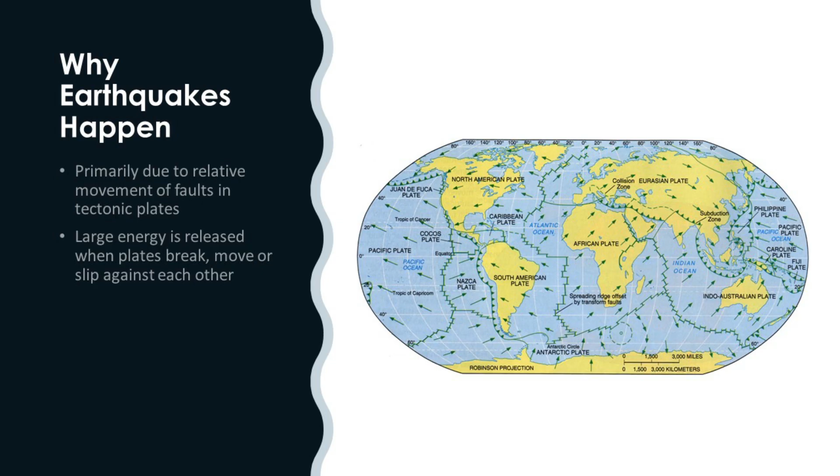First, let's go back to the basics. Why do earthquakes happen? What causes an earthquake? I'm sure all of you listening are already aware that earthquakes happen because of the movement of tectonic plates, because of the faults that are generated—they move and accumulate energy when they cannot move, and then suddenly move, and you get earthquakes. So that we know, and there are so many plates with movements around the world.

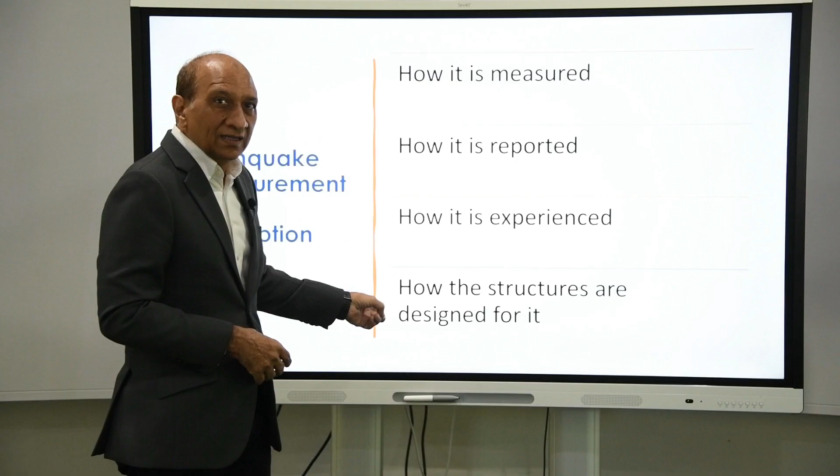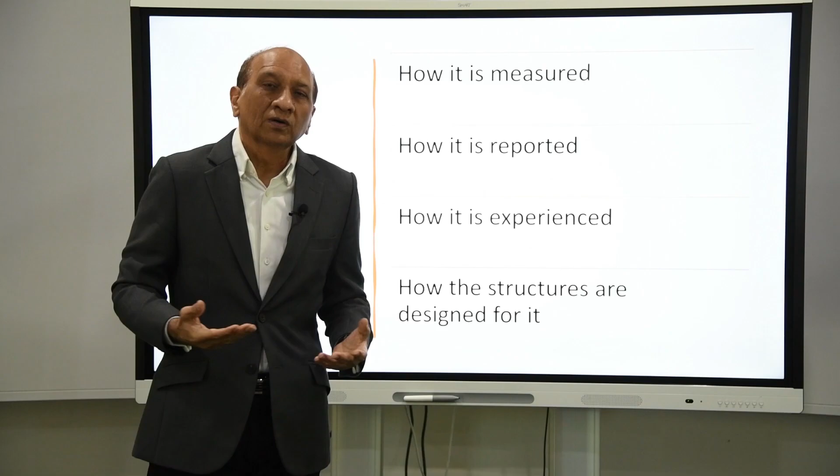Once an earthquake happens, there are four things related to that earthquake event. Number one, how is it measured—what is the measure of the earthquake? Second, how is it reported in the news? Two different things. And then, how is it experienced by people near where the earthquake happened, far away, and in other places—in a tall building, at the ground floor, or in a car? Everybody experiences the earthquake differently. So the experience of the earthquake, how it is reported, and how it is actually measured are all very different. And how it is designed for is much different from all three—how a structural engineer designs for earthquakes is a very different story compared to all of them, and they are not directly interrelated. But somehow they are related, and that relationship is what we are looking at today.

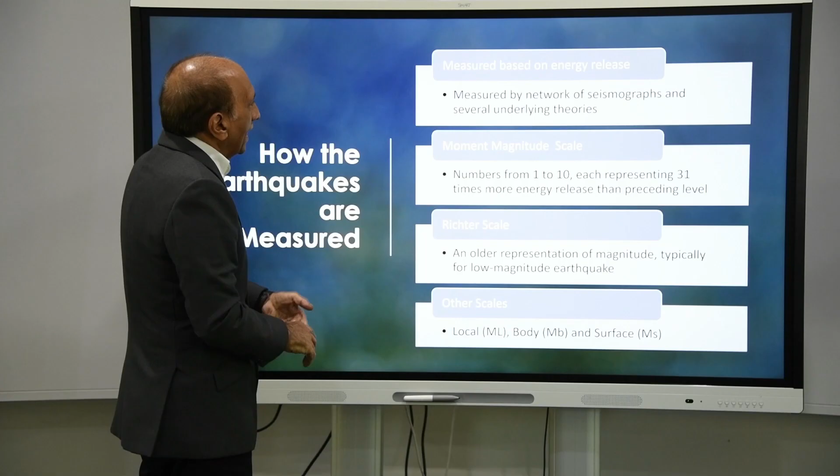So what is the measure of the earthquake? How is it measured? An earthquake is basically a release of energy that has been accumulated because of strain. It is measured as the energy released at the source where the earthquake happened, along the fault, depending on the length of the fault, the movement, the type, and other things many of you already know. So the measure is energy, and we put it on a scale—those scales tell us from the minimum zero energy to the maximum possible energy that can be generated. That's why we have the most common scale, called the moment magnitude scale, which is the one we normally report.

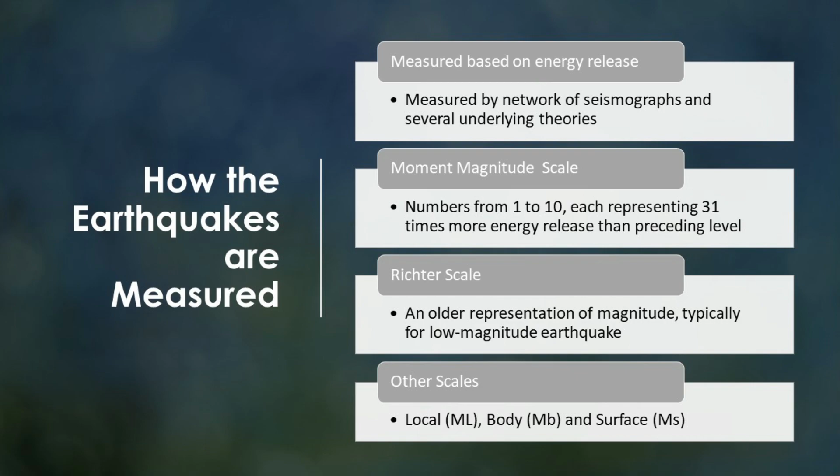We see the report in the news where they report this magnitude, say 6.87, on a scale from 1 to 10. The Richter scale, which some people are familiar with, was an earlier version of the same scale, but it wasn't as good at measuring large earthquakes, and it was more of a local effect. It didn't have many of the good things that the moment magnitude scale has, which covers the local body and surface waves together. So this moment magnitude scale is a more comprehensive measure of the earthquake, and that's the one you normally see reported in the news. That's the common measure now.

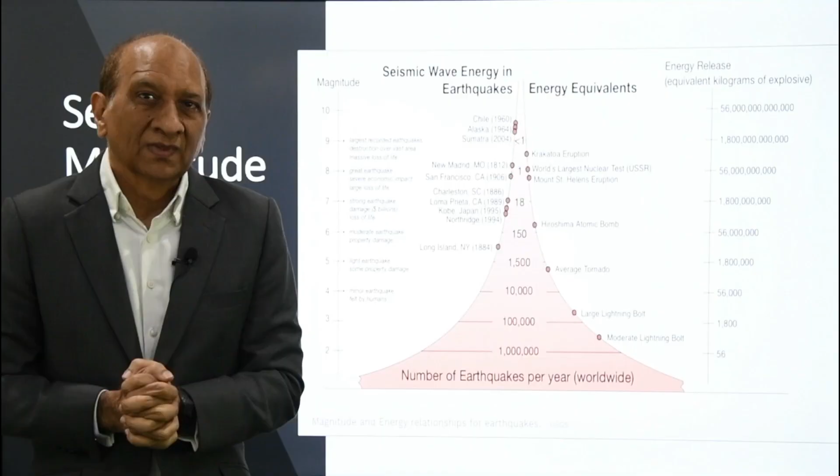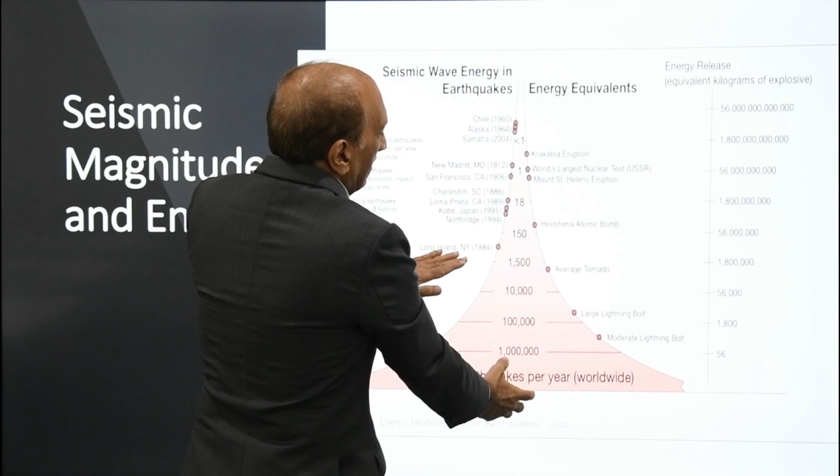Now, one important thing about this scale is that it's even beyond log. Every step in the scale is about 31 times stronger than the previous number. So the energy released goes up by billions of times as we go up the scale. And the number of earthquakes that happen is the reverse: a lot of earthquakes happen with lower magnitude, and very few happen at higher magnitude. We assume that beyond 10 there is no earthquake computationally possible.

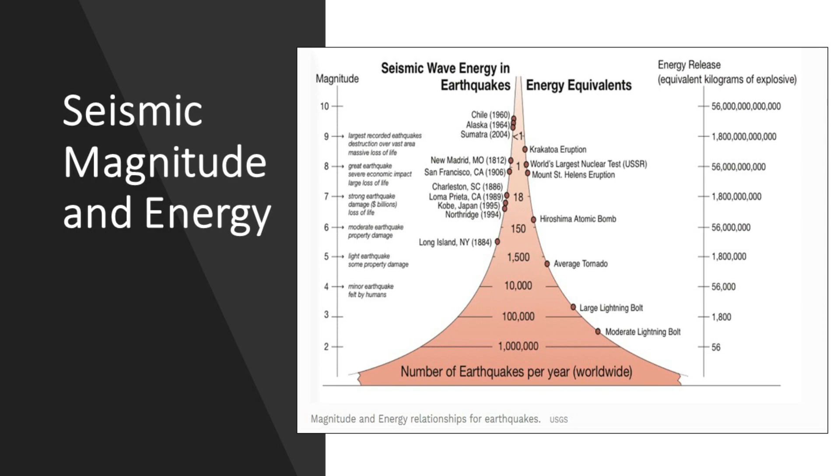So that's the scale, and you can see a lot of earthquakes listed on it. This is the scale that people are normally familiar with, not the one we're concerned with. Now, where is our structure on this? Where is the earthquake and where is the structure that we want to design on this scale?

Let's come to the next one: how it is reported. This is how it is reported, as I showed you. They say a 6.2 earthquake happened and many people died, bodies are being discovered, and they show pictures of buildings fallen down, completely collapsed, cars crushed, and so on. That's the image people get of a strong earthquake, even at 6.2 magnitude. And then people get worried about what their house is going to do if an earthquake like that happens.

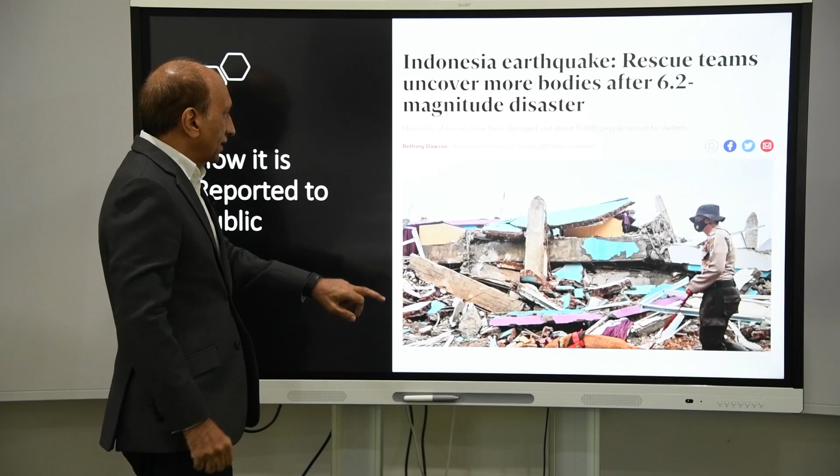This is videos, this is news, and it flashes everywhere, making everybody concerned about their community and their house. Now, how they feel the earthquake is another issue. When an earthquake happens, depending on where they are, whether they're awake or asleep, moving or standing still, on a tall building or on the ground floor, they experience it differently and feel things moving. Depending on that feeling, another scale, the Modified Mercalli scale, is used, ranging from 'not felt' to 'extreme.' It's all related to how you feel.

Now, this is actually not related to the earthquake magnitude, because the earthquake may be happening very far away, your building may be very distant, so you may not feel it much, while people nearby may feel it differently. I've personally experienced several earthquakes of different kinds, in a tall building and on the ground. Last time there was an earthquake in Nepal in 2015, I was there, and there were many aftershocks which I could feel. We ran out of the school we were inspecting at one point because it was so strongly felt, since we were very close to the epicenter. But the same earthquake was not felt far away.

In Bangkok, I remember the tsunami - the earthquake happened very far away in Indonesia, but our building in Bangkok actually swayed so much that we had to go down the building. The water pipes broke in the elevator shaft because the building was susceptible to that kind of earthquake, with long period and so on. That's another story altogether. My point is that we all experience earthquakes differently, and how we experience it is based on this Mercalli scale - we can say an earthquake was mild or strong, not related to the magnitude, but to how we experienced it. That's another scale.

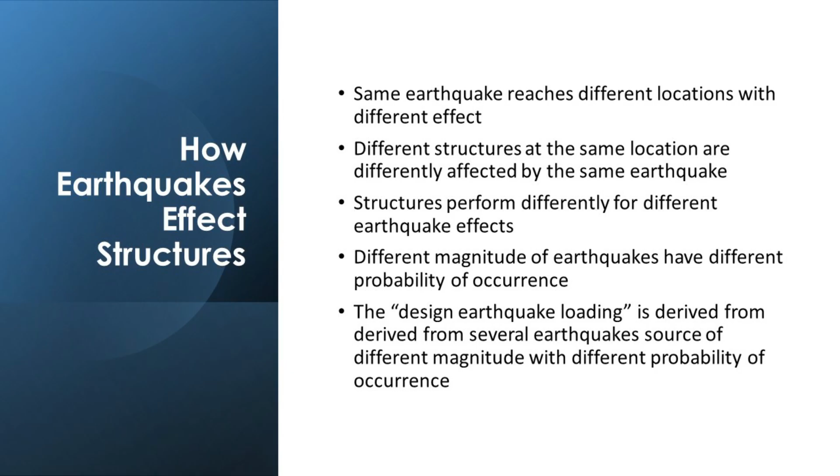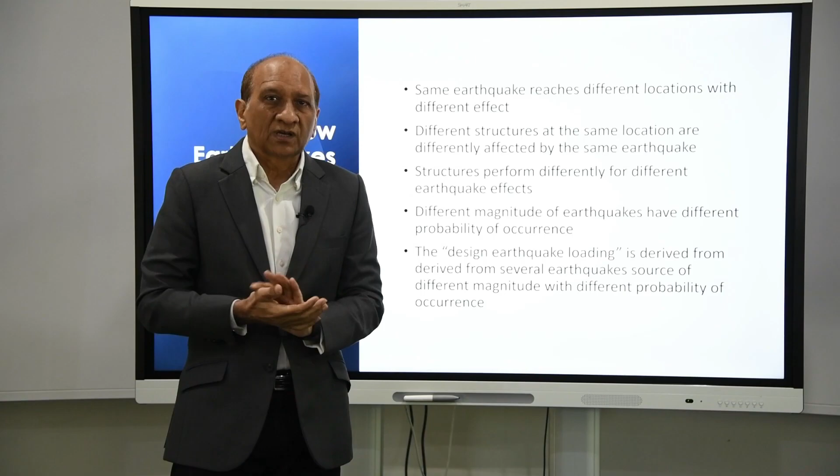Different magnitudes of earthquakes have different probabilities of occurrence. That's another issue—different earthquakes happen at different frequencies, and we need to consider that too. The design earthquake loading is derived from several earthquakes from different sources, different magnitudes, with different probabilities of occurrence. All this information is collected and analyzed, and the seismic hazard is developed by codes, building officials, or countries after accumulating this data and the risk profile of the particular location.

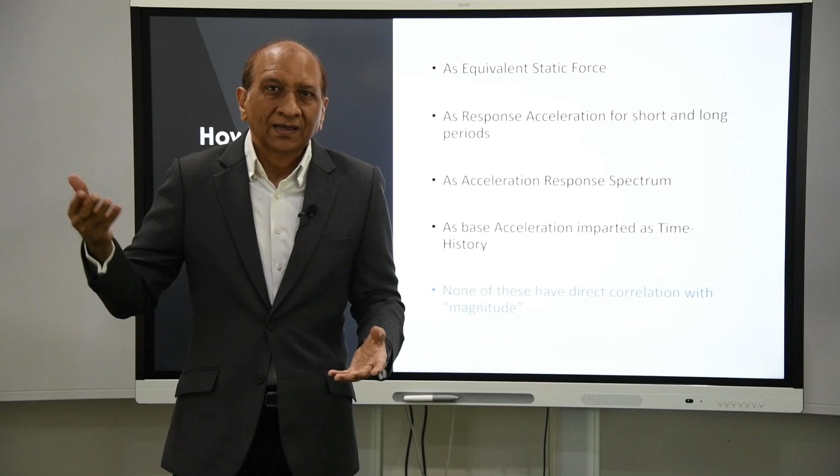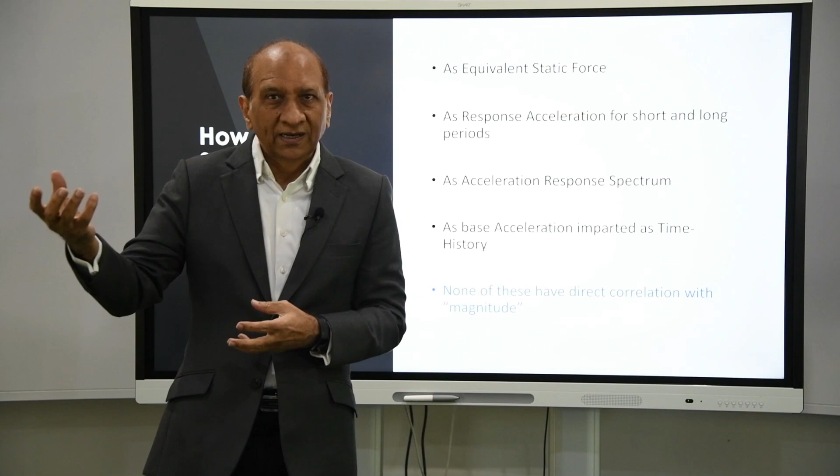Then maps are made, and that's what leads to the design—that's where the design earthquake comes from. We take that design earthquake and convert it into some kind of input to our structure. That input could be as simple as an equivalent static force—we convert the earthquake, a complex phenomenon, into just an equivalent force applied at each floor level. That's the simplest one. The second is converting it into response accelerations for short period and long period effects, covering buildings of different height, stiffness, mass, and natural frequencies.

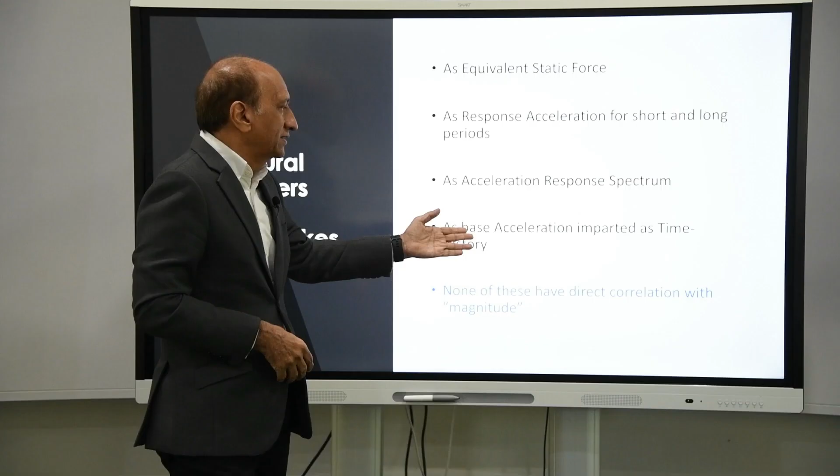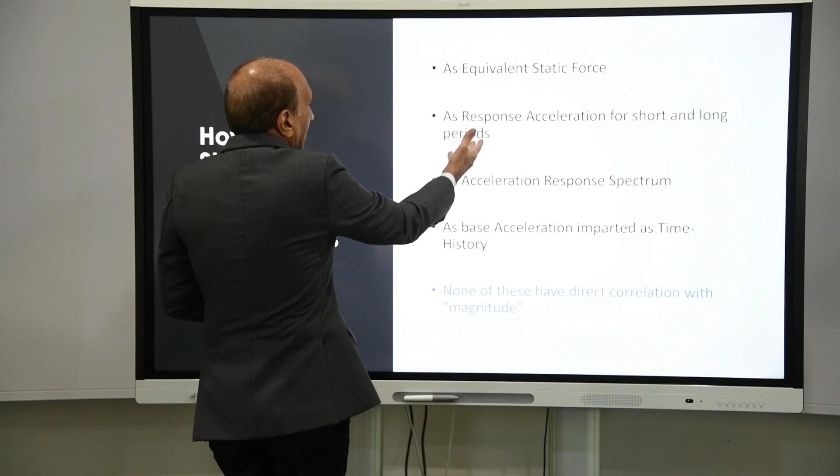Or it can be an acceleration response spectrum covering a broader range of response, or a base acceleration imparted as a time history, or we could actually shake the building with simulated ground motion to see dynamic and even nonlinear effects. We can do any of these depending on the type of structure, tools, and experience we have. Most codes let you do the first two or three, while the last one isn't done as often.

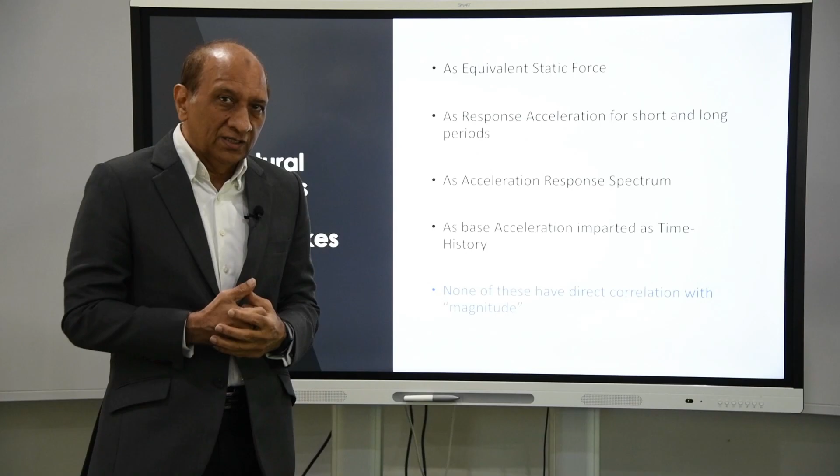But none of these have a direct correlation with the magnitude, as you can see. We're talking about things that are far from the magnitude of the earthquake actually happening at the location of the epicenter. So then, how are we going to connect it?

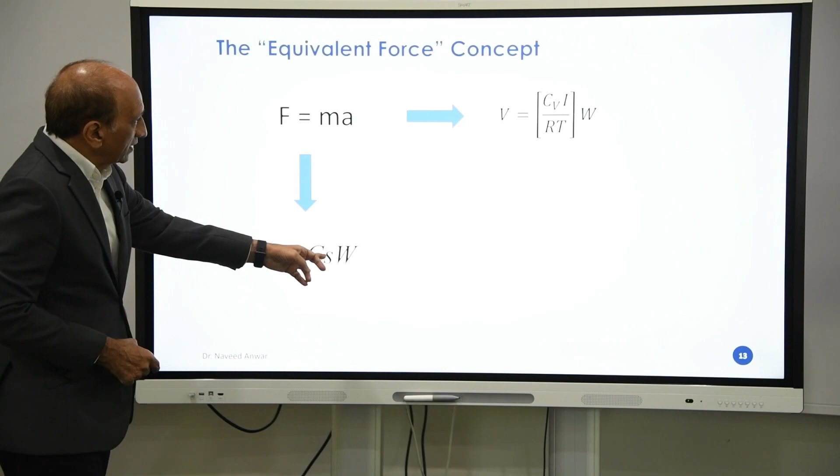Basically, we start with Newton's law of motion: force equals mass times acceleration, because earthquake is an acceleration. So we relate the mass of the building with the ground acceleration—but not the ground acceleration itself, rather the acceleration of the mass that's actually moving because of it. This leads to several equations—the old style has a factor that adjusts the acceleration and multiplies it with the weight, with corrections including the structure's type, R factor, and other things. Similarly, the newer version combines all of that into a single factor, which becomes more complex to determine and considers more variables. But basically, we're simply following F equals ma, modified for different things.

So this is an attempt to convert the acceleration response into an equivalent force using this concept, and corresponding maps have been developed.

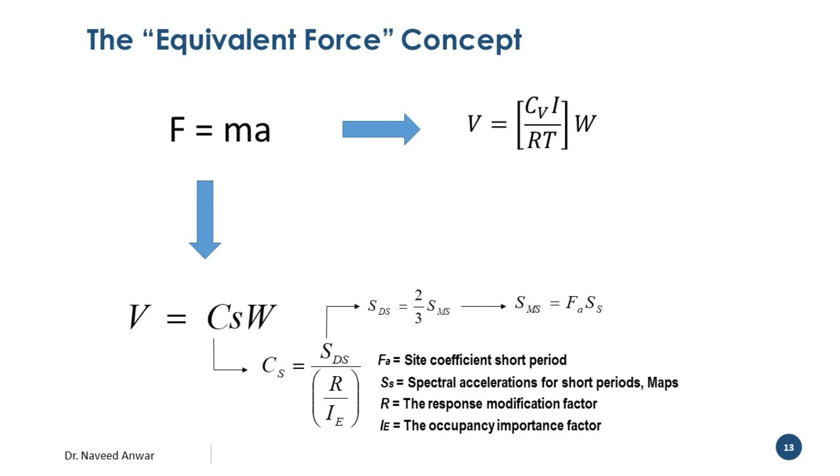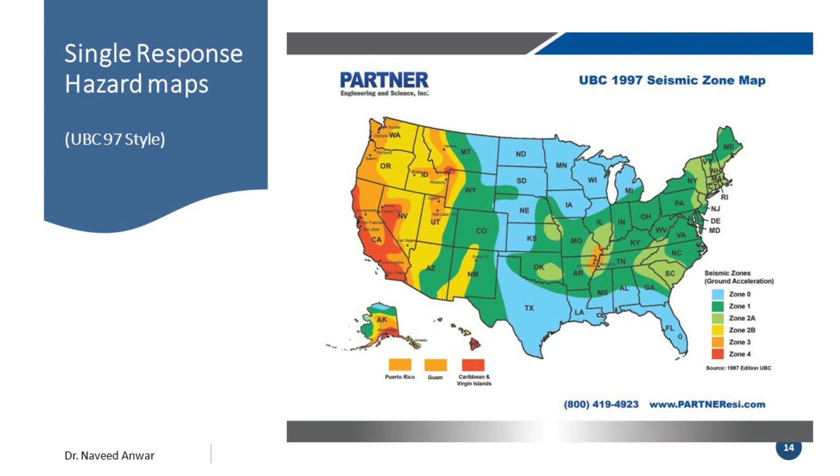This is a map developed with the older version of the equations, where the countries or regions are divided into zones from 0 to 4 or 5, indicating the severity of the hazard. People take that zone, take the acceleration associated with that zone, multiply it with the equation, and get the force.

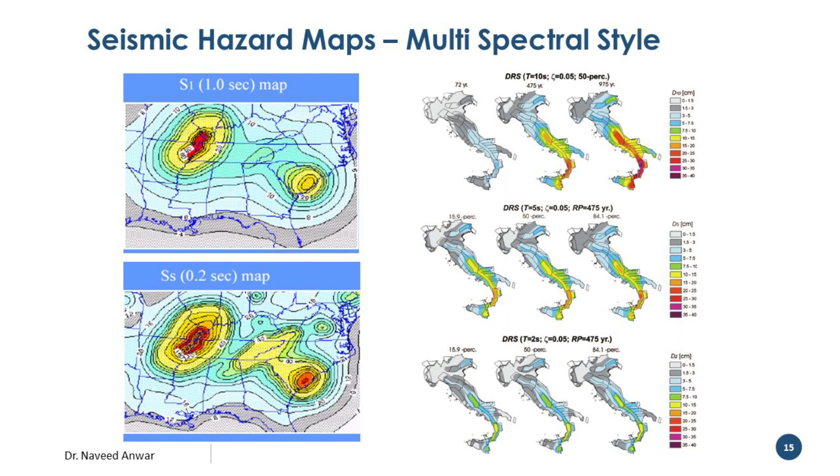The newer version or newer maps incorporate more details. They talk about the return period, the various parameters coming from the response, and they also have a short period response and long period response. These maps are more comprehensive and incorporate more information, and the newer versions of the equations can use this information. Or you can use the response spectrum developed for a particular country or region, modified by some factors for local conditions. The response spectrum covers a longer range of natural periods and can be applied to tall and short buildings as well.

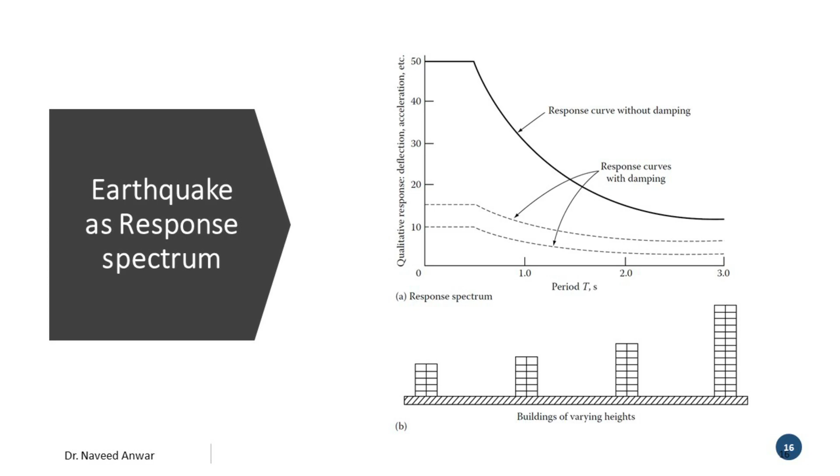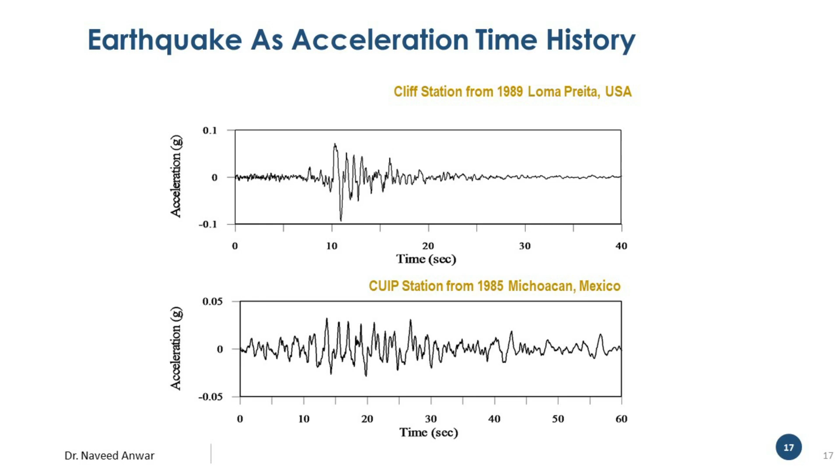So that's how we convert the earthquake into a way to apply that as a factor or as an acceleration that will be used to calculate force. Or we can shake the building by a simulated time history or series of time histories, then let the structure determine the forces based on that with the damping and all of those stuff. This is obviously more accurate as long as we have a good ground motion input that we can apply.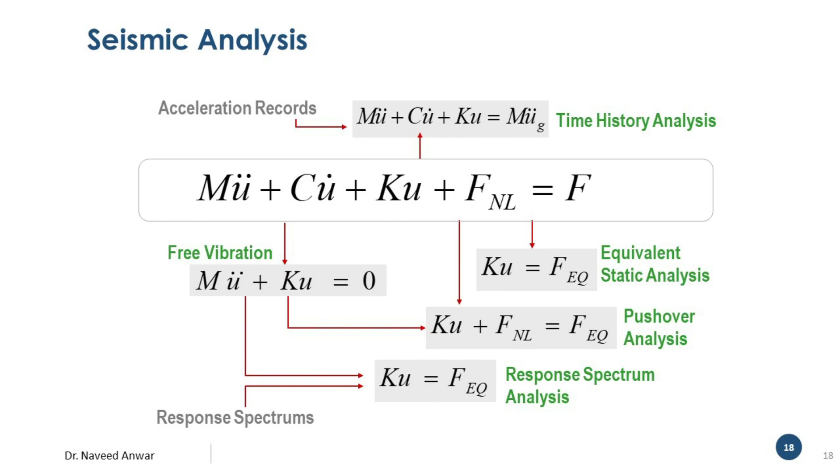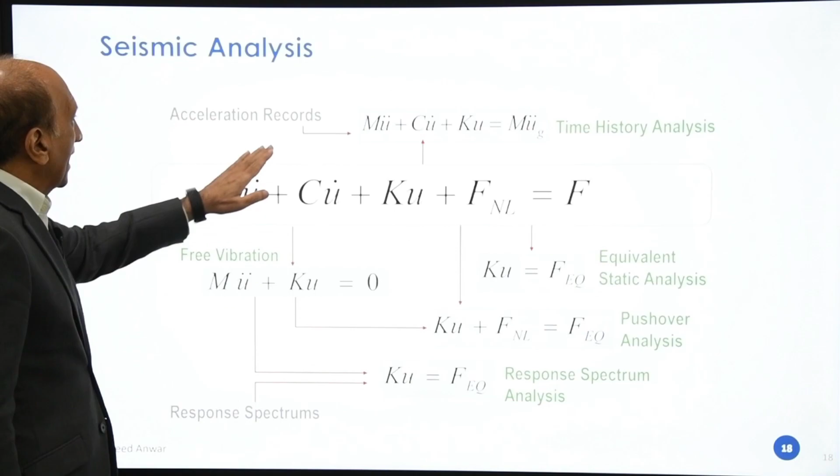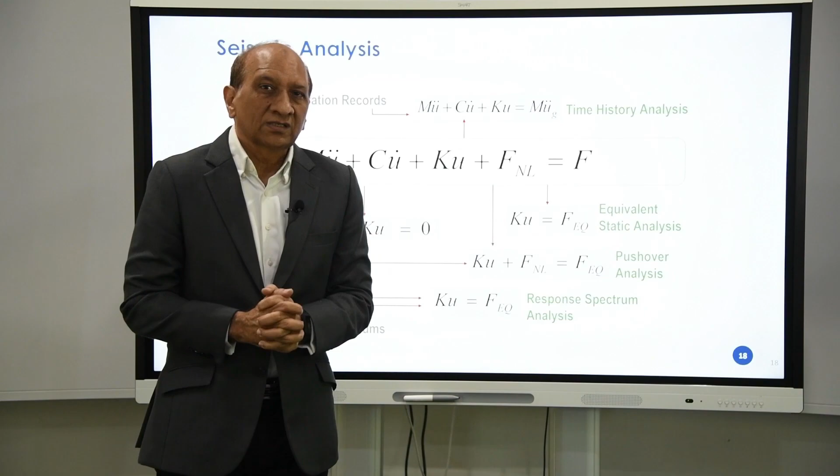And this is finally the equations, the main equation that we use to compute the response of a structure for the earthquake. We are talking about the nonlinear dynamic equilibrium equation, and from this we can derive the free vibration, the equivalent static force that I mentioned, the pushover analysis, the response spectrum analysis, as well as the time history, linear and nonlinear analysis. All of that is included in this big equation, and this is what the software normally uses to determine the response depending upon what input or method we use.

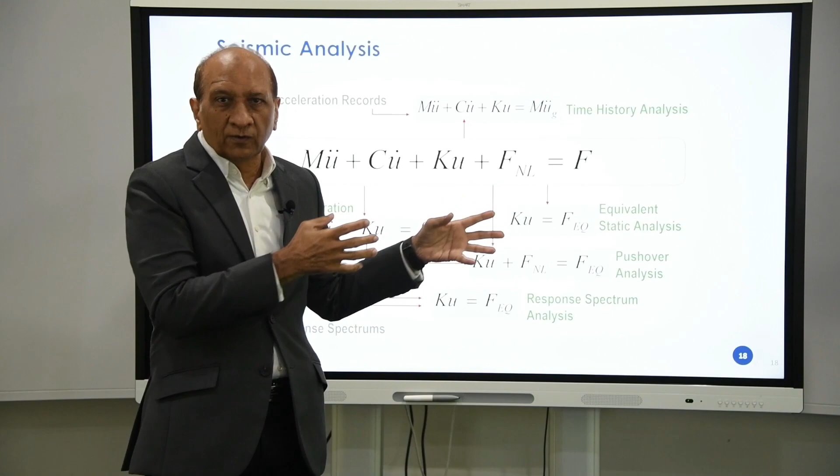So structural engineers can determine the response, bending moment, displacement, stresses and other things from earthquake based on any one of those inputs that we talked about. Once again, none of them directly related to the magnitude.

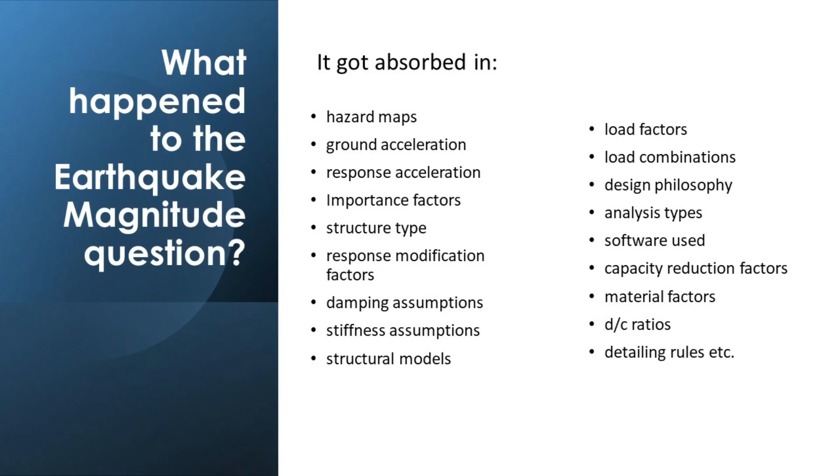So where is the magnitude now? Magnitude got absorbed in so many factors: hazard maps, ground acceleration, response acceleration, importance factor, structure type, response modification factor R, damping assumption, damping ratio, stiffness assumption, cracked or uncracked, structural models of different kinds - linear, non-linear, shell model, frame model - load factors, load combination, design philosophy. So many things happened in a structural design, and it all basically absorbed that whole hazard into these factors.

And the design comes out, which now is very hard to correlate to where we started from, the origin of the earthquake. So what is the possible answer to the question now, if you have done all of that following the design codes and design approaches?

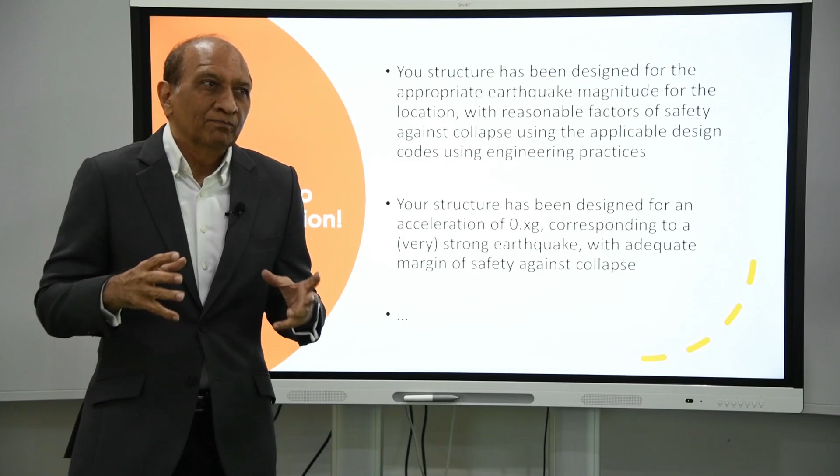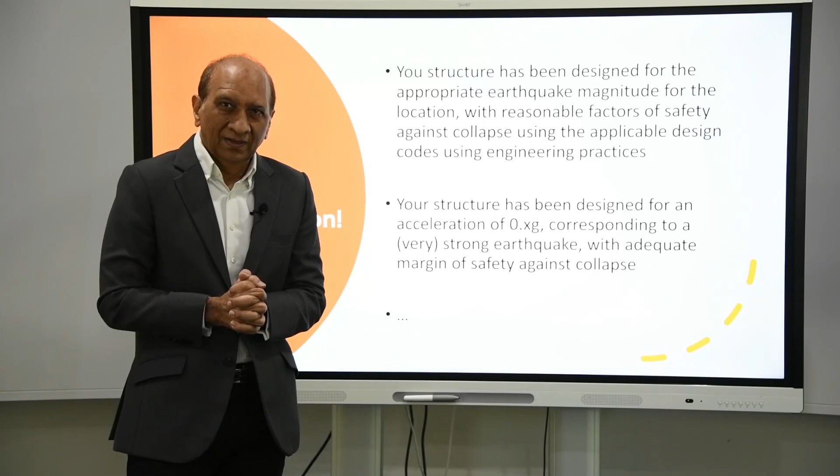The possible answer is: your structure has been designed for the appropriate earthquake magnitude for the location that your structure is in, with reasonable factors of safety against collapse, using the applicable design codes and engineering practices. So we can make that statement that don't worry, your structure has been designed by considering all the earthquakes that can affect that area, and the engineering judgment and the load factors and safety factors have been designed, so you don't need to worry. But we cannot say which exact magnitude.

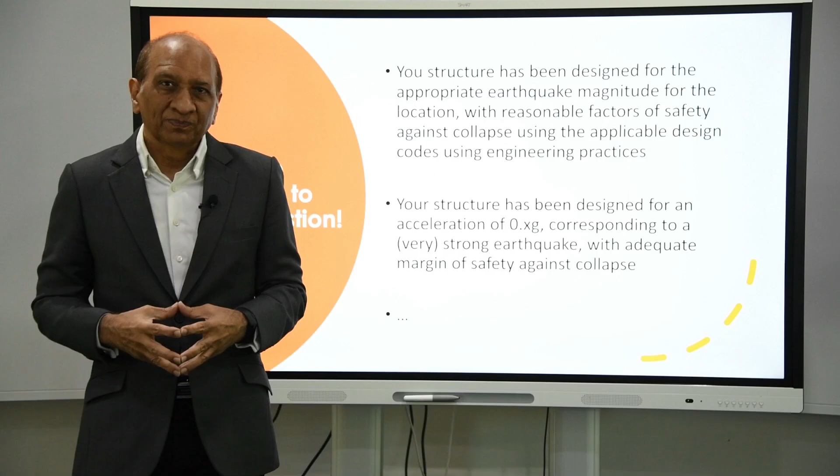Or your structure has been designed for an acceleration of 0.xg, 0.2g, 0.5g, corresponding to a very strong earthquake with adequate margin of safety against collapse, which can be related to the maps again, because this acceleration is part of the map. But again, the acceleration is at the site, not relating to the magnitude once again. So these two answers are possible.

One is more technical, one is more general. Whether the public will be satisfied with these answers, it depends. But it still did not answer - it's very hard to answer directly what magnitude has been used.

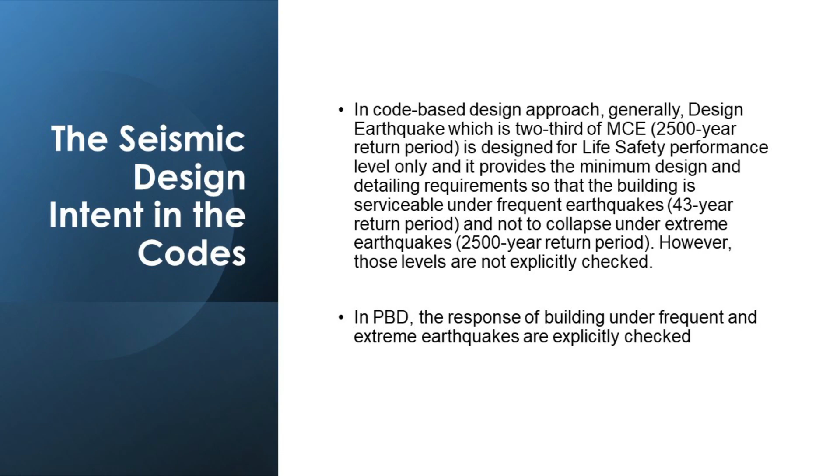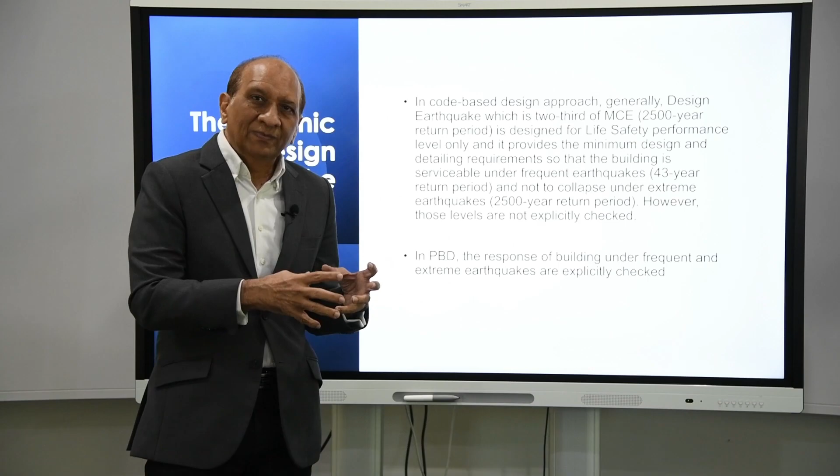So code-based design approach has very good intent. It basically covers 3 levels, but not explicitly, implicitly. Service level earthquakes, moderate earthquakes happen frequently with no damage. A design earthquake is certain, which is about 2/3 of the maximum earthquake that can happen, and that is a design basis with factors, and the maximum earthquake, which is the MCE, without collapse. So that's the intent of the codes, but there is no explicit check.

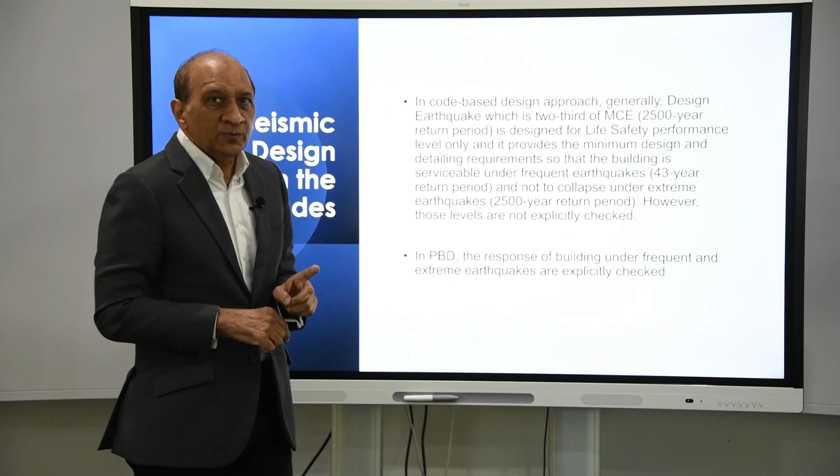Performance-based design, on the other hand, can make this check more explicit and hopefully lead to a better answer. Can performance-based design help to improve the answer? The answer to this question is yes.

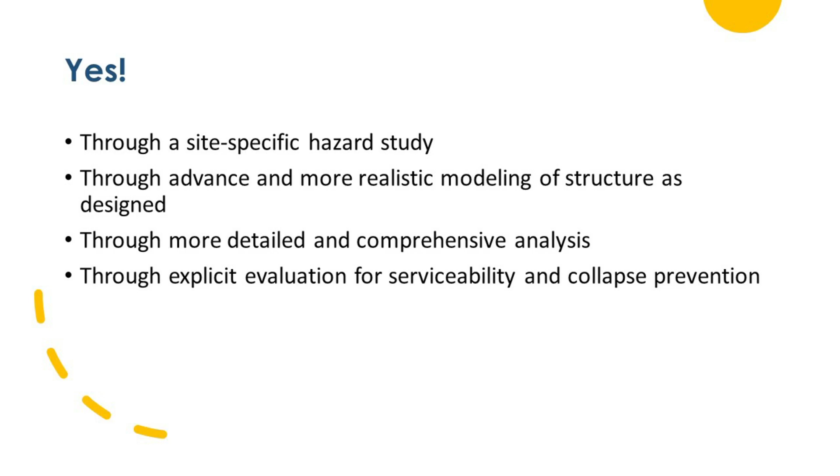We may have a better way to answer the question we started with. Through a site-specific study, we can get very specific information about the hazard, not a general country level or even micro-zonation map—though micro-zonation maps will help a lot—but a site-specific study. Through advanced and more realistic modeling of structures as designed, we design the structure first and then model it to check the performance.

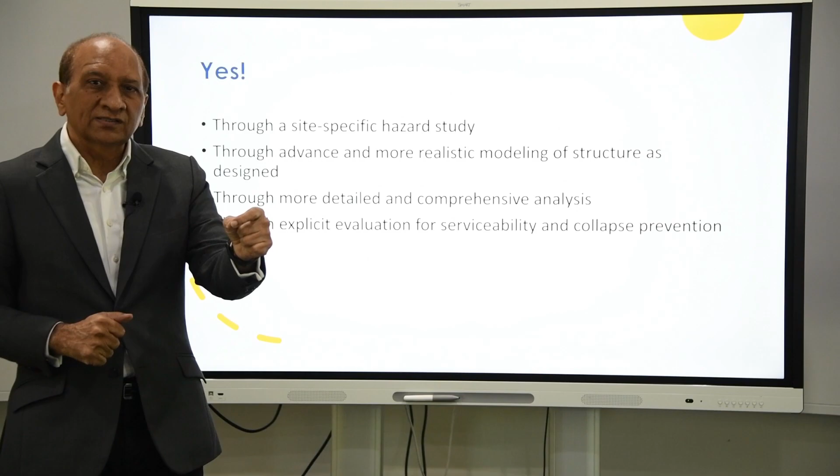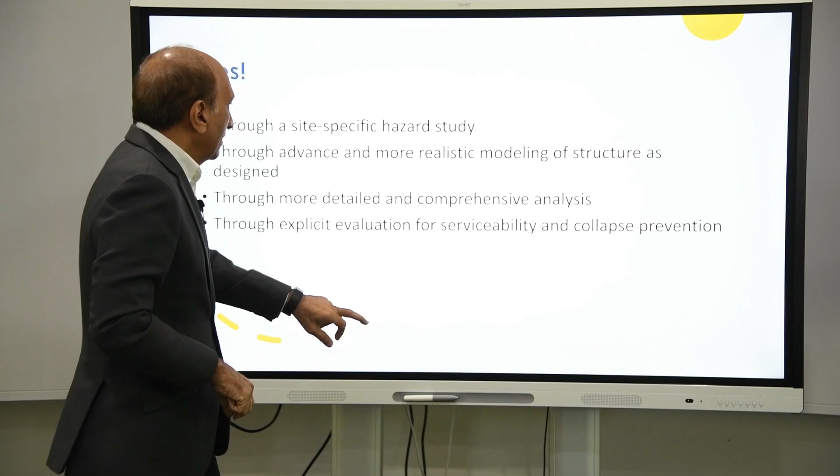We don't design the reinforcement to come to one solution, but rather we check what has been designed. Through more detailed and comprehensive analysis, as mentioned in previous discussions, and through explicit evaluation of serviceability and collapse prevention—basically correlating the hazards with the performance at different levels, different performance expectations, as well as hazard level. So this is what performance-based design can give us together with a site-specific study.

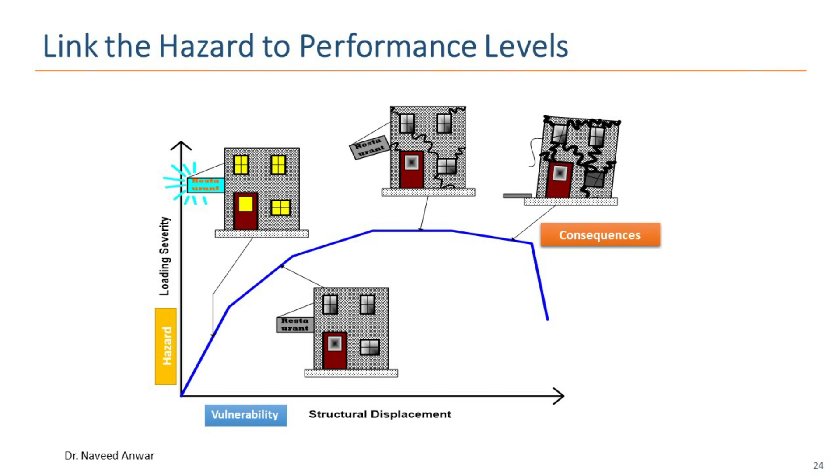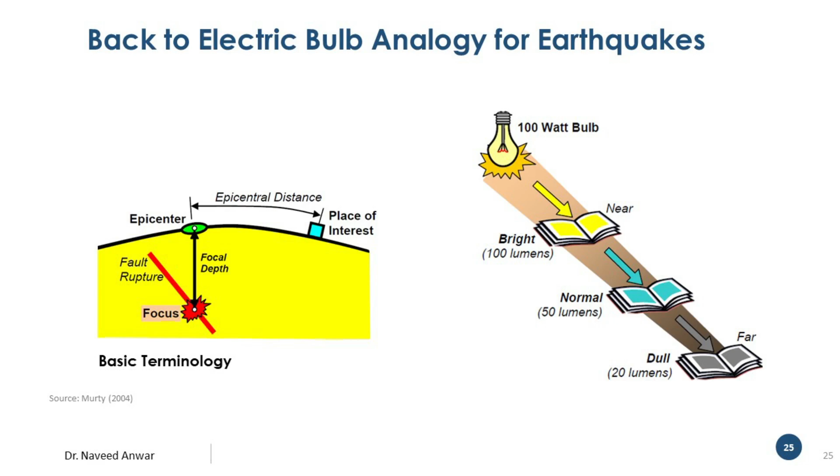So after having done that, let me come back to this light source analogy once again. This is taken from Professor Murty's book, which I really like—I've used it in many lectures.

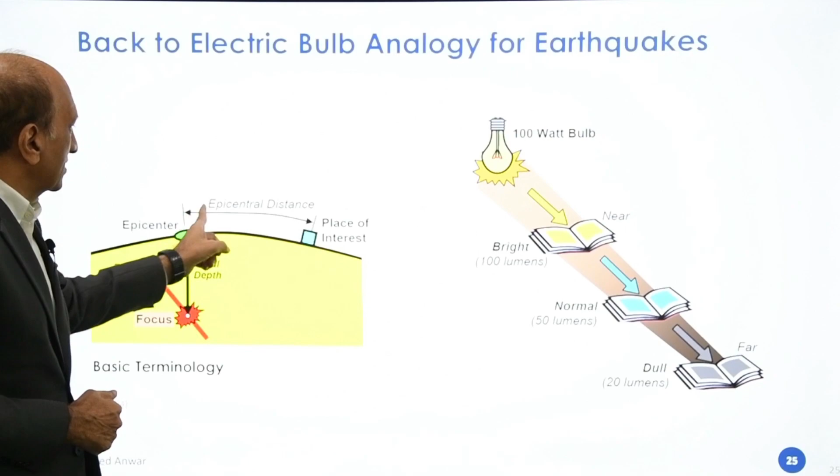It clearly shows the focus is somewhere in the ground, and then at the surface where we normally measure it, and then there's a place of interest where the structure is made. There's a distance on both sides, a fault line, a direction, and many things. Just like a light bulb, depending on how far you are, the light may be experienced differently, what is in between, and what is the type of book you're reading, and so on. This analogy still holds when we're trying to connect the earthquake magnitude to the structure.

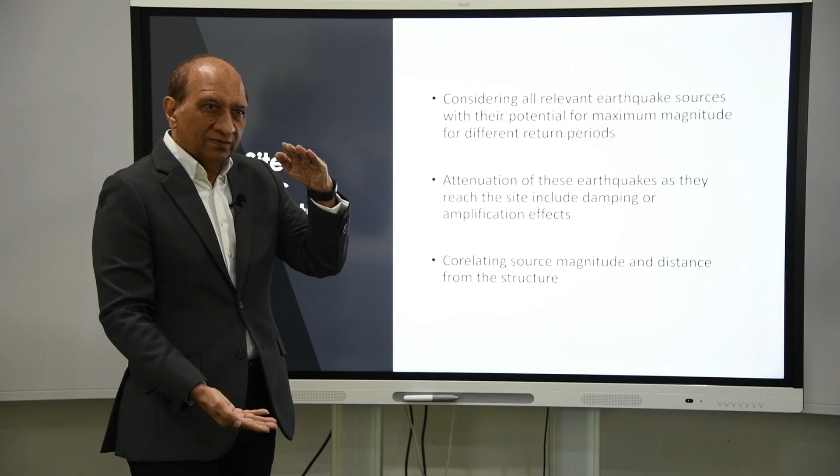The site-specific study considers all relevant earthquake sources with their potential maximum magnitude at different return periods. It also considers the attenuation, or transfer, of that ground effect of the earthquake to the site, and what is in between and below, between the bedrock and the structure—like the basin effects in Bangkok or Mexico, all those things are considered. And then the amplification effects and damping effects are considered.

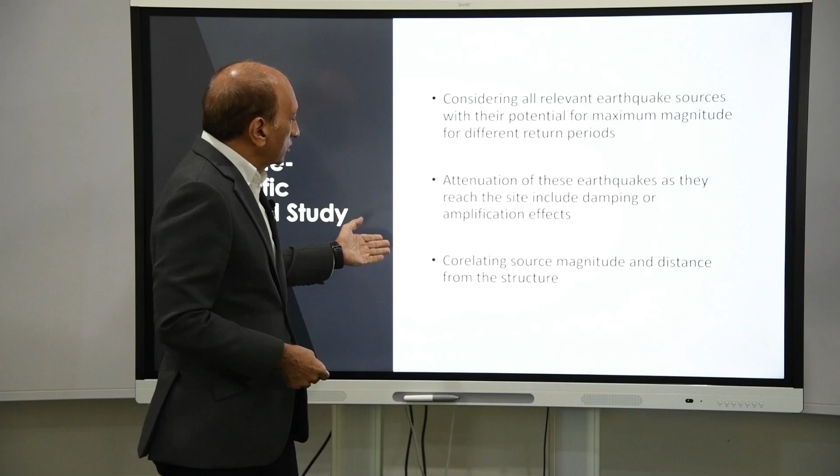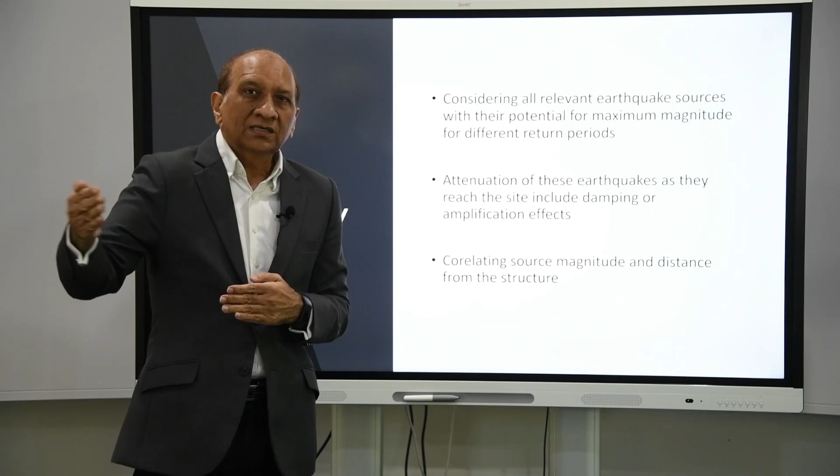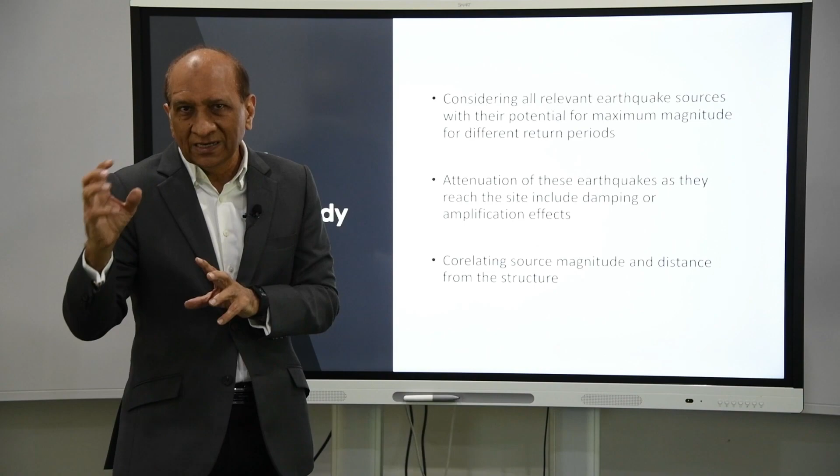And then correlating source magnitude and distance from the structure—so it also correlates how far the earthquake will happen and what will be the magnitude and so on. This study basically studies every relevant seismic zone or potential earthquake point and their potential of producing an earthquake, how it reaches the site, and what the site is like.

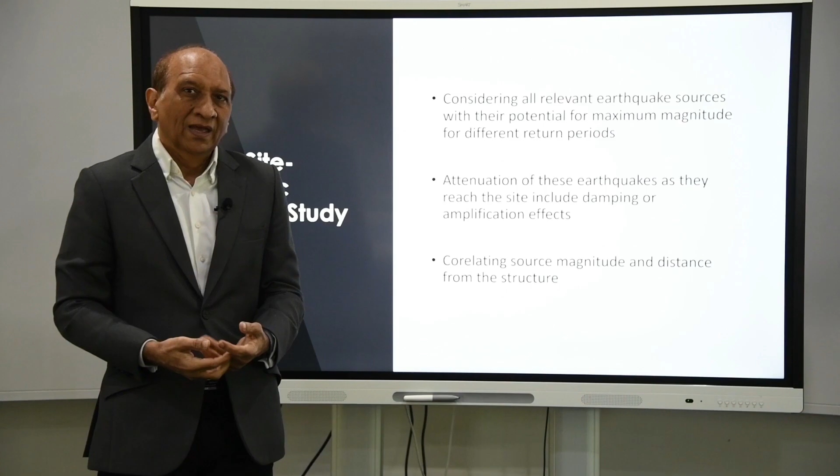And then it comes to the structure, which is the PBD. This is very important—site-specific study gives us that information. After having that, we can then see what is the contribution of each different source of earthquake coming to the site.

So we can identify, okay, this seems to be the most prominent source of effect from this site. And it can be the ground acceleration, short period, long period response, and so on. Many things can be calculated with different return periods. This will relate the effect of different earthquakes at different locations for the structure.

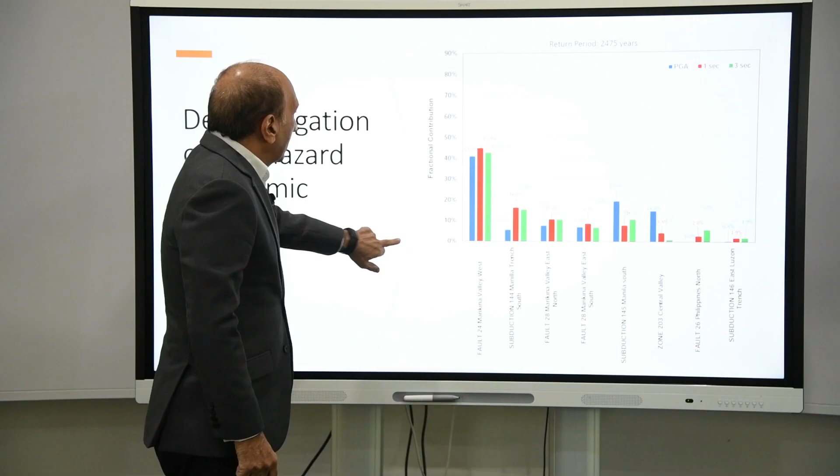This may shift if the structure is somewhere else, but here this particular site is the one that will govern. So now we know this is the one we should be looking at when we look at the magnitude. It also correlates the distance and magnitude with the fractional contribution.

That means what is the relative contribution to our total risk from different sites located differently at different distances with different magnitude. So again, it tells us, oh, this is the one we should be looking at because this has the highest contribution—so we should be looking at the magnitude of this earthquake at this distance.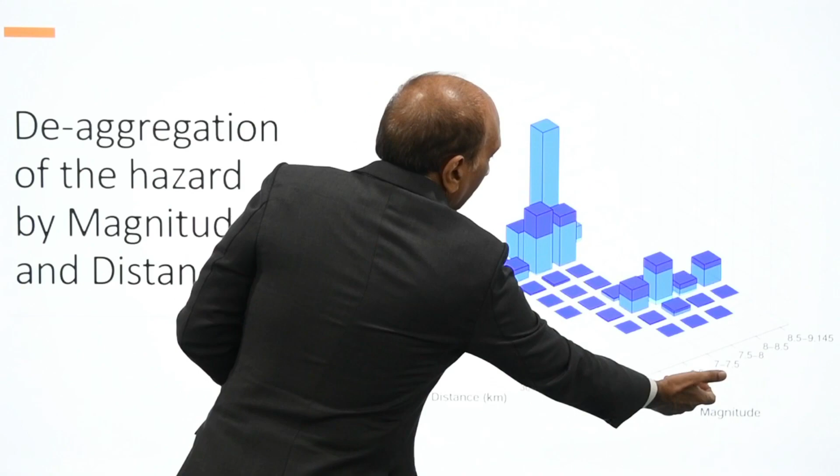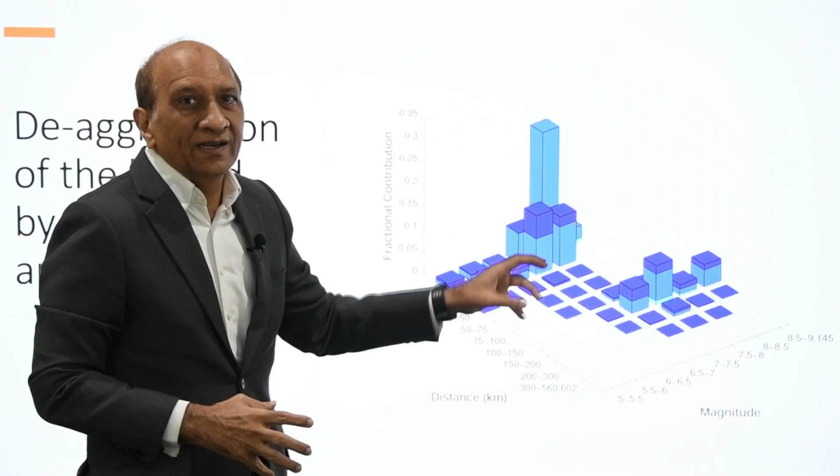So we can say from here that, okay, a 10 kilometer far earthquake with 6.7 or 6.8 magnitude is the one that is going to have a more critical impact on our structure. So we have more or less identified now the magnitude of earthquake for which the structure is primarily designed, including all the effects of the other earthquakes that might happen.

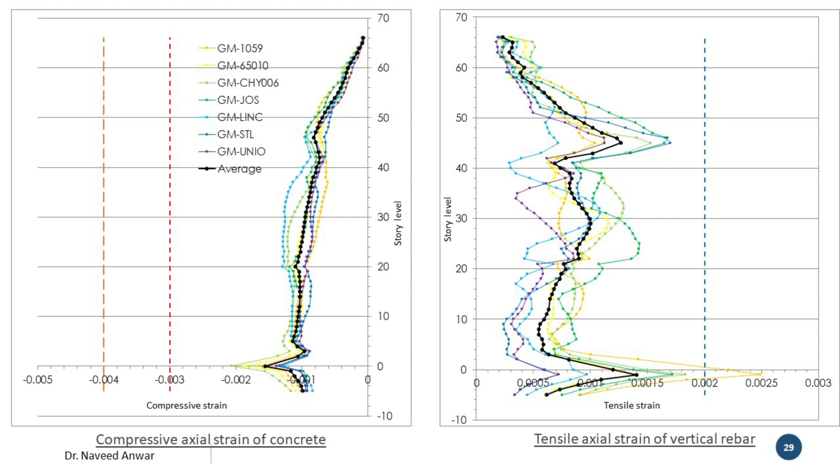After doing the PBD, we can actually determine the strains, stresses and response, and check everything, whether the wall is yielding or cracking, or whether the coupling beams will be okay or not. We do all those checks, knowing these ground motions derived from those locations have been considered with different frequency content and so on. So it's a very comprehensive analysis that gives us some level of confidence that this structure is going to be fine, or this part is going to be damaged, but this part is not going to be damaged.

With all that information, we now have an alternate answer, which is close to what we want to get. So now the answer can be: your structure is capable of resisting a magnitude N earthquake happening at location A with a probability of occurring every 2,500 years.

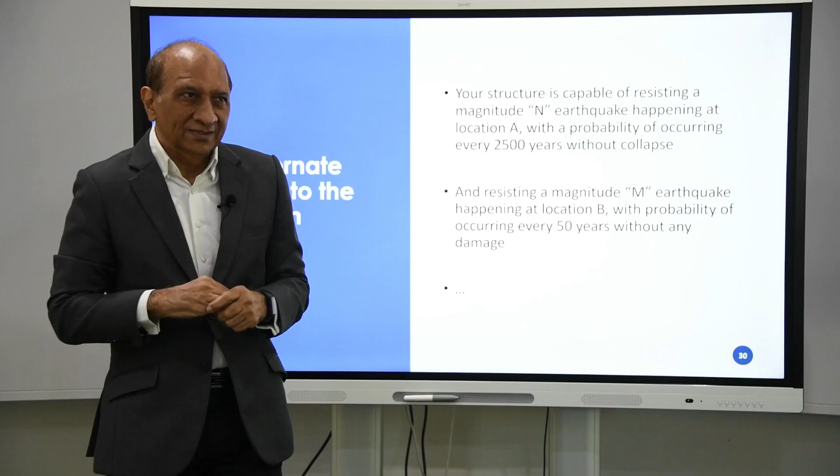For example, for Bangkok, for a long time people believed earthquake is not a hazard, and people didn't design structures for that for a long time, because there was no near fault, no earthquake sources nearby. But as the knowledge developed, we know that even though we don't have an earthquake near Bangkok, earthquakes happening in, let's say, Myanmar, in the Mandalay region or a northern region, can actually affect the buildings in Bangkok.

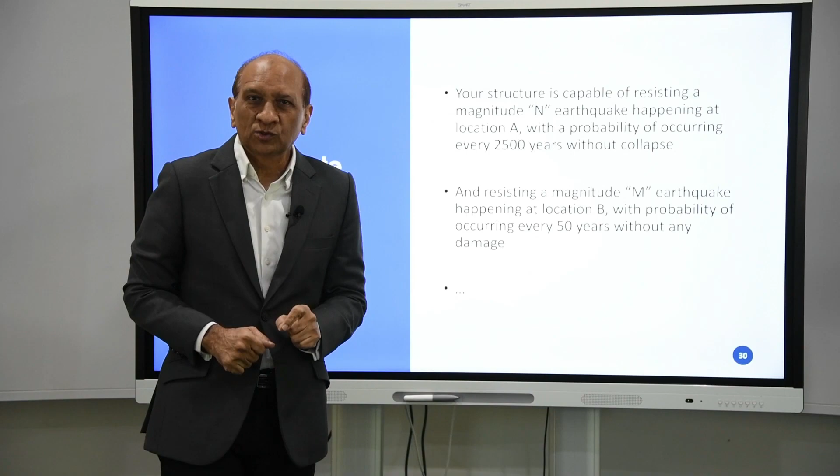Including the soft soil that we have here, buildings especially in the range of 20 to 25 or 30 stories -- that has now been determined through site-specific studies and performance-based analysis. Now we can say an earthquake of 6.7 magnitude in Myanmar will be very critical for a building having 25 stories in Bangkok. That's how refined our answer can be.

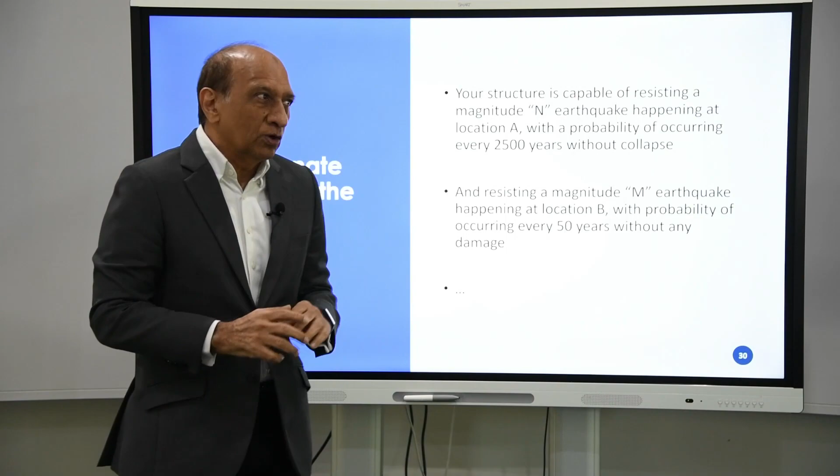Or a 5.5 earthquake in Chiang Mai, for example, will have similar effects and so on. So now we can be very clear about the magnitude for which the buildings are designed, not only in a region but at a particular location.

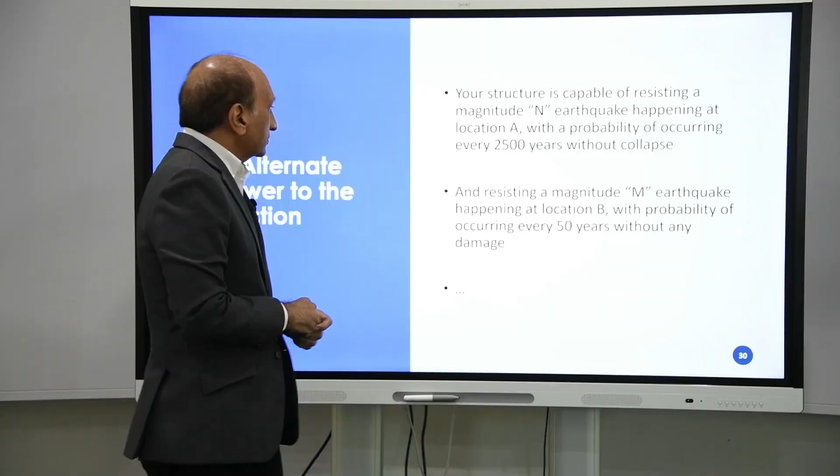A 5-story building will be affected by a different kind of earthquake, a 20-story building differently, and a 50-story building differently. We can also say that this structure can resist an earthquake of magnitude M happening at location B with a return period of 50 years without any damage.

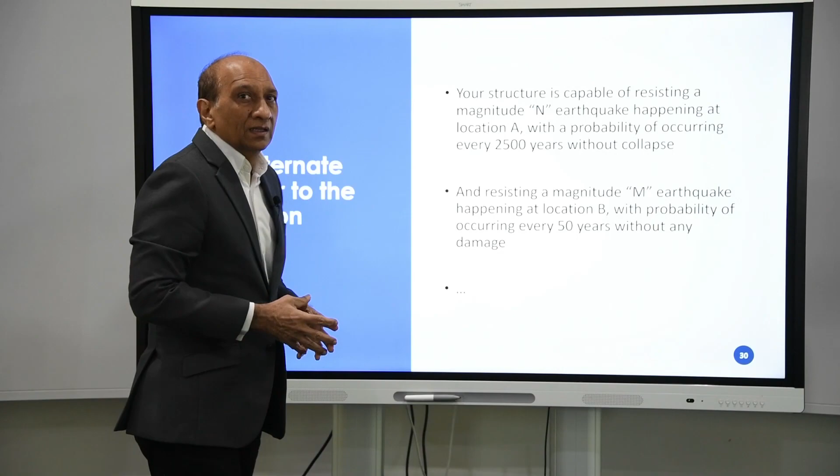So serviceability can be confirmed or reported related to the magnitude, location and occurrence interval, and safety can also be connected to magnitude, location and occurrence. This is what we can get from PBD, which we could not clearly get from code-based design unless we know a lot of background on the development of the seismic risk maps of the location.

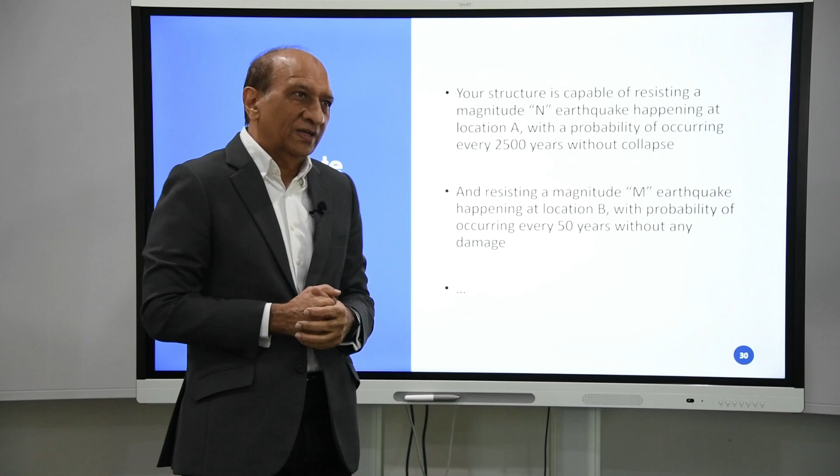So now we can conclude, or we can summarize: designing structures to safely and serviceably resist the effects of earthquake is a complex process. We know that -- it involves too many things, as I mentioned: too many unknowns, too many assumptions, and too many complexities.

The intent of the design codes is to provide us with the framework so structures can be designed safely for the applicable hazards at that location, which is a combination of all the hazards coming from different areas, with certain factors of safety and so on.

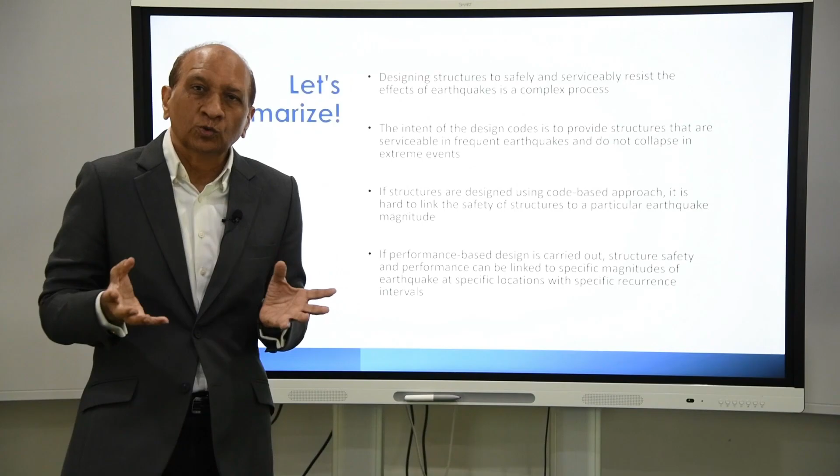If structures are designed using a code-based approach, it is hard to link the safety with the specific magnitude and location, because the maps do not clearly tell us that, and we haven't actually done an evaluation for the design anyway -- we have simply followed the code with all the factors included there.

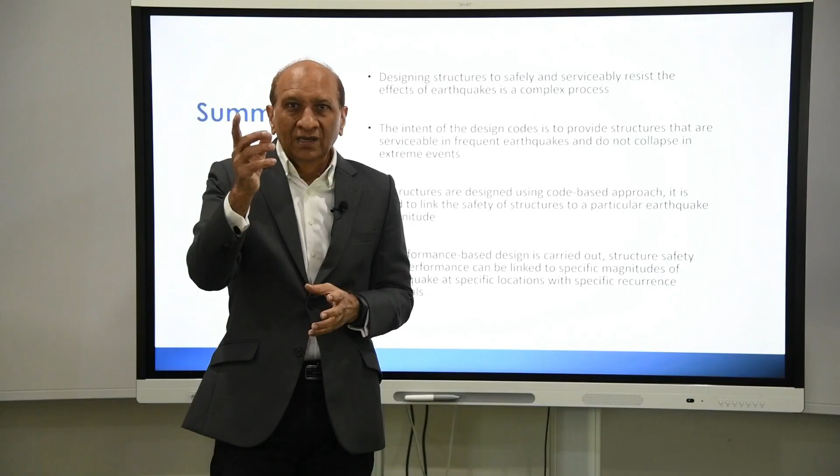If performance-based design is used, we can actually identify the controlling earthquake from a location with the probability of occurrence, to say this is the earthquake that really governed -- because we've looked at the time history response from every earthquake, and we can see which was the maximum one that controlled the design or the output for different locations. Remember, different parts of the structure may be governed by different earthquakes and ground motions or time histories.

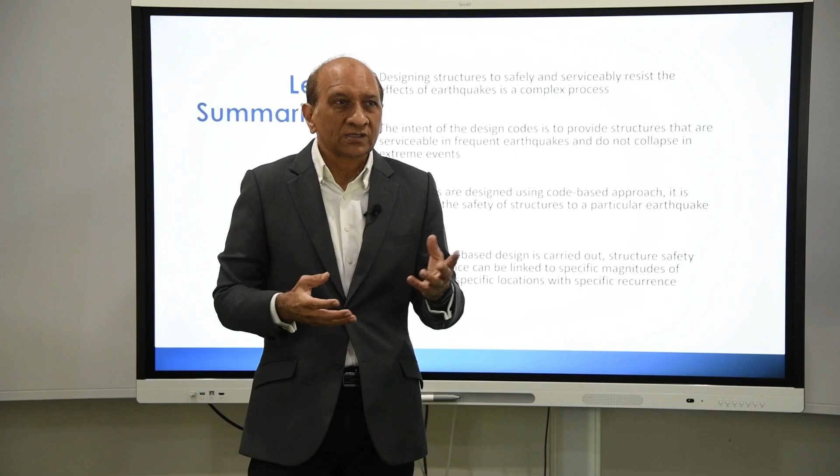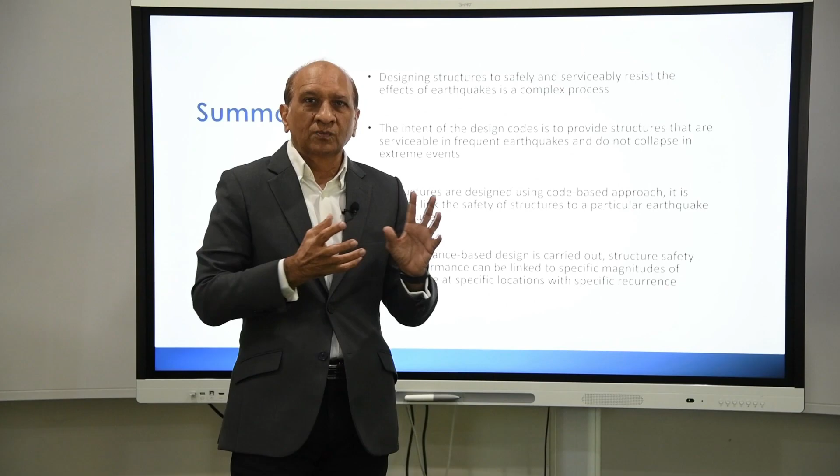It depends -- that's why we do 11 or 33 or more ground motion analyses, because we want to capture the response from every possible variation. So that's what we have when we try to respond to the question: what magnitude earthquake has our structure been designed for. I hope this discussion